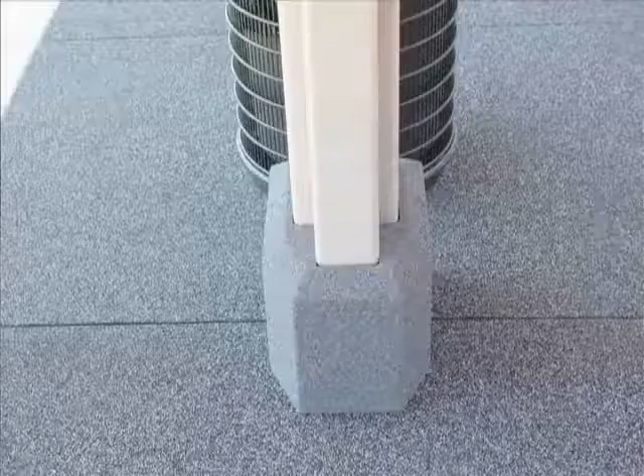Based on the test results that we have, the armor deck panel would be suitable for any kind of floor system because of its stiffness and high load carrying capacity.

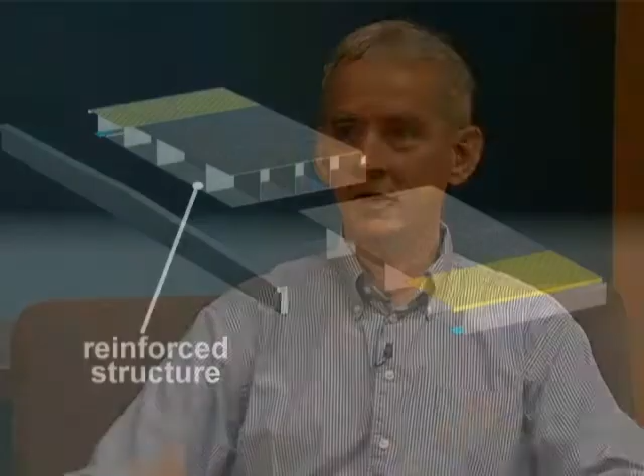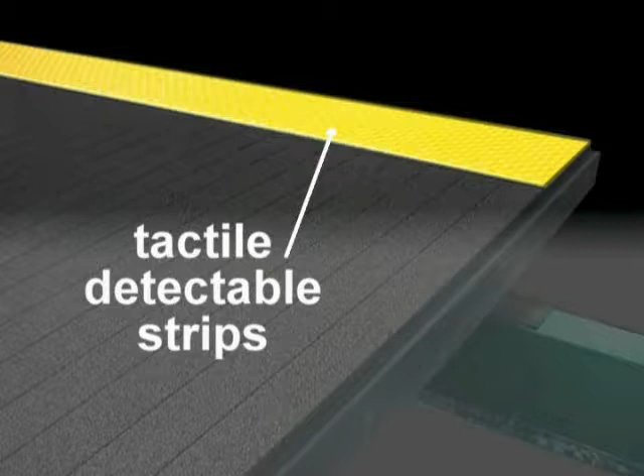Every aspect of the panel is incorporated into the manufacturing process, so when it comes out of the form, it's complete, including the anchorage plates that are all part of the forming process. If the panel requires tactile detectable strips on the edge, they're incorporated into the form. They're integral to the system.

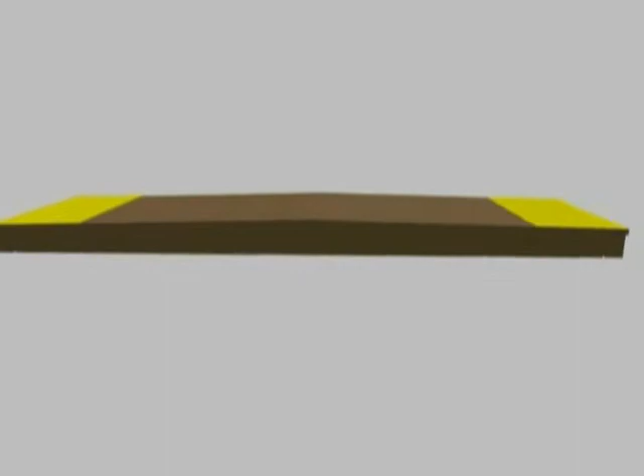The test protocol for this panel was developed primarily by WJE in conjunction with discussions with Engineered Plastics, looking at the product components, how they were put together, and how the product was made, to give us an understanding of what's inside this panel that we were going to receive.

We developed the test protocol, including the vibration test protocol, the load test protocol, the uplift force, and the uniform load values. The first test that we did on the armor deck panel was a vibration test.

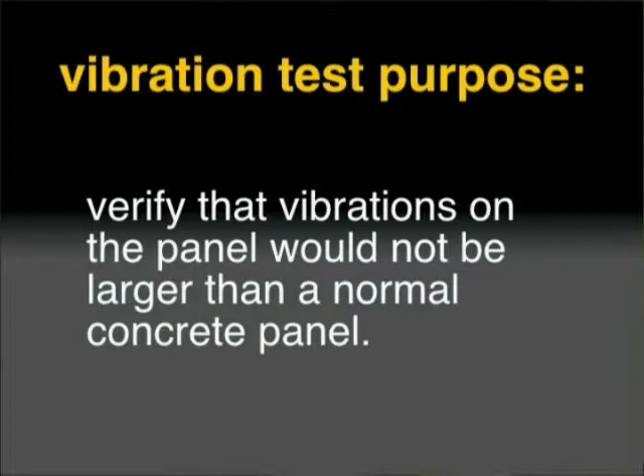The purpose of the vibration testing was to verify that vibrations on the panel would not be larger than anticipated on a normal concrete panel. There are ANSI guidelines for allowable vibration levels, or perceptible vibration thresholds.

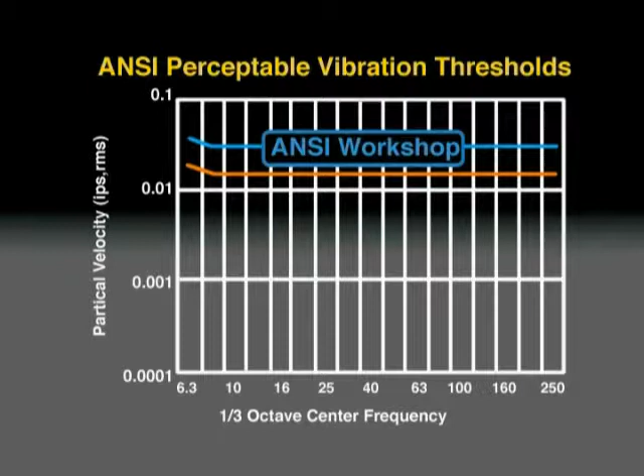Being a lighter weight structure than normal, we needed to verify that the vibrations on the platform did not exceed those perception thresholds. People standing on the platform would be disturbed if, while standing there, people walking behind them produced a large magnitude of vibration. So we needed to verify that those vibrations were not excessively large.

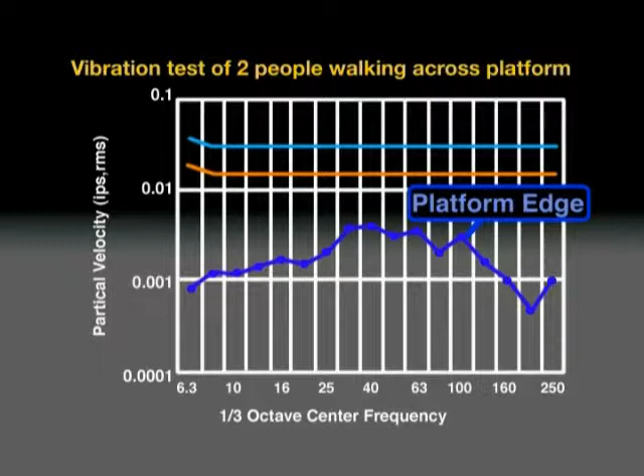The testing that we did showed that the vibrations on these panels were no larger than walking on a similar concrete panel. We set up the panel in the lab, measured vibration response due to small impacts to determine the resonant frequency and the damping characteristics of the panel.

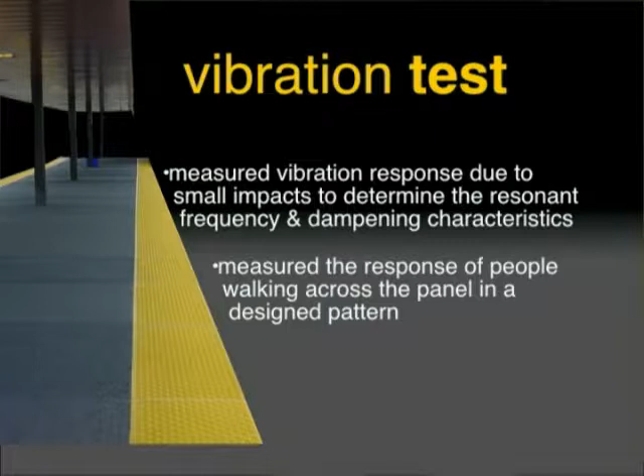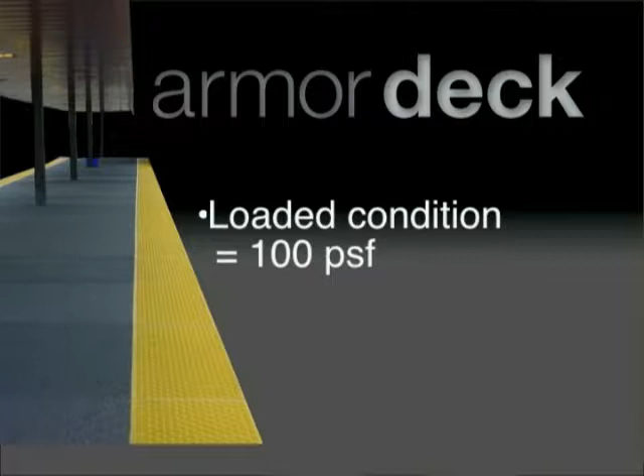Then we had people walk across the panel in a designed pattern and measured the response of people walking on the panel, both in an unloaded and a loaded condition, where the loaded condition was 100 PSF uniform load. We achieved that load by setting lead ingots across the panel surface, leaving a traffic pattern for the people to walk through, and we measured the dynamic response as they walked across the panels.

One test that we did in the field was a side-by-side vibration comparison test on a Metra station in Hazel Crest, Illinois. Engineered Plastics had installed one of their armor deck panels in a Metra station that was planned for renovation. They installed it in between the existing concrete panels.

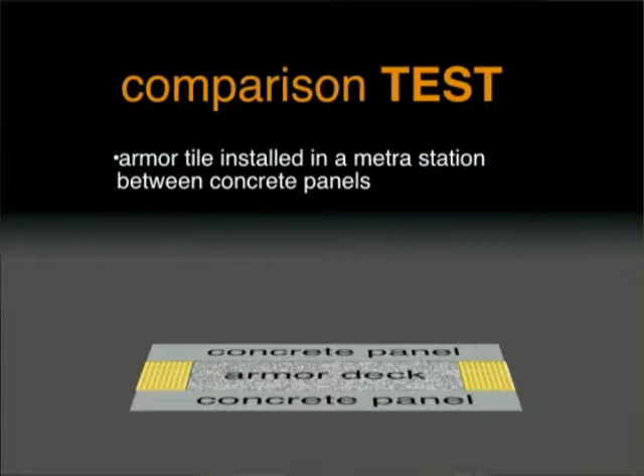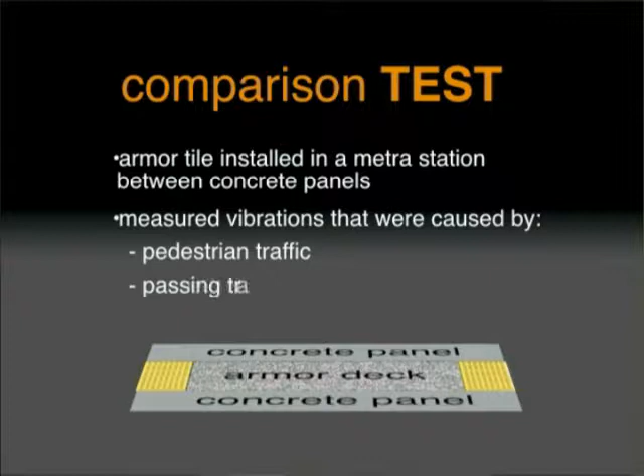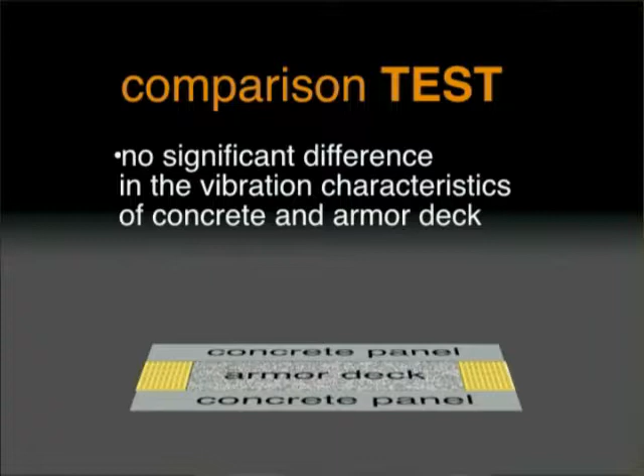I went to that station and measured vibrations produced by people passing, walking over the panels, and vibrations produced by passage of a train, to demonstrate the difference in vibration between the armor deck and the concrete panels. The results of that test indicated there was no significant difference in the vibration characteristics. The train passage produced essentially the same magnitude of vibrations on the concrete panels as the armor deck panels.

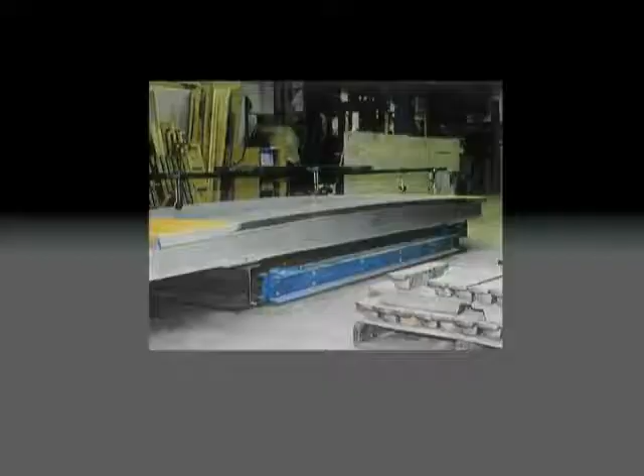The next test after doing the vibration testing was to do a load test on the panel, applying a uniform load in increments up until we actually failed the panel and got it to collapse. We applied these loads in 25 PSF increments, up to a uniform load of 300 PSF.

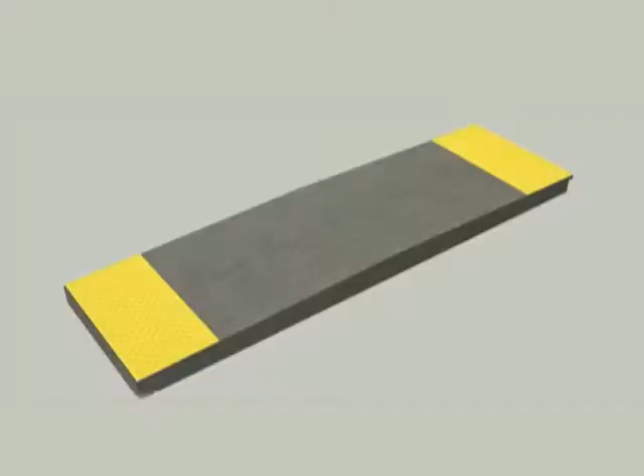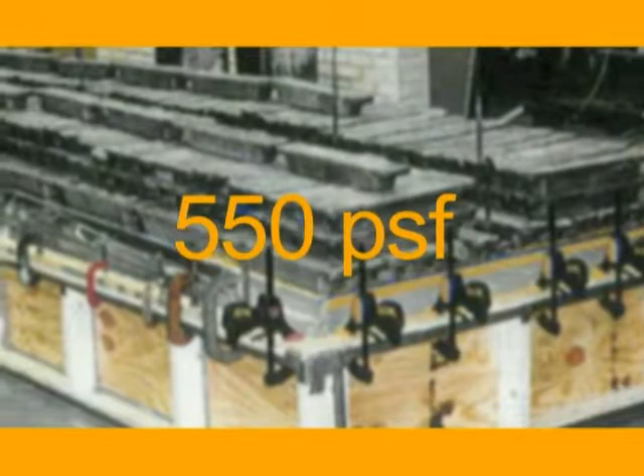The design load, or the intended uniform live load that should be applied to the structure, is 100 PSF. Our intent was to load it to 3 times that amount and verify that it could take that load safely with a minimum amount of deflection. We ended up applying a load of 550 PSF to the panel, and we still couldn't get it to fail. So it was basically 6 times the allowable design load.

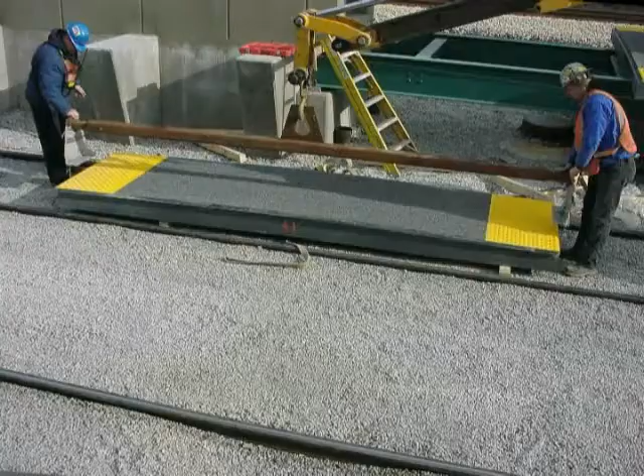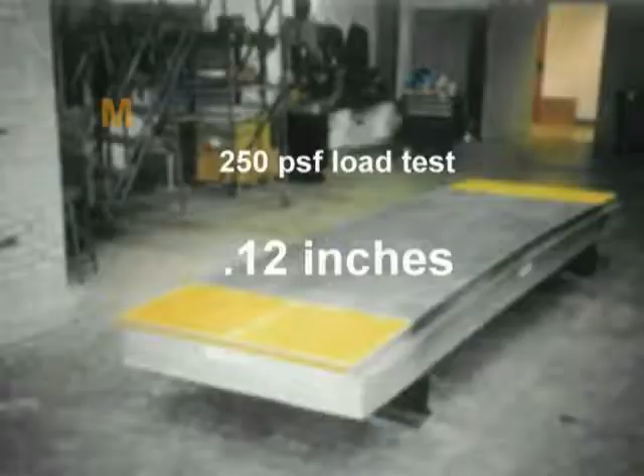As far as design criteria, the allowable deflection is supposed to be 1/240th of the span. We calculated that the allowable deflection at 250 PSF, which was the design allowable live load, should allow a deflection of 0.54 inches. The magnitude of deflection that we had at the 250 PSF load was actually 0.12 inches instead of 0.54. We calculated that out to be 22% of the allowable deflection.

This panel was impressive in how rigid it was.

The fact that we were able to load it to 600 PSF and still had no significant deformations, no failure of any element of the structure was impressive.

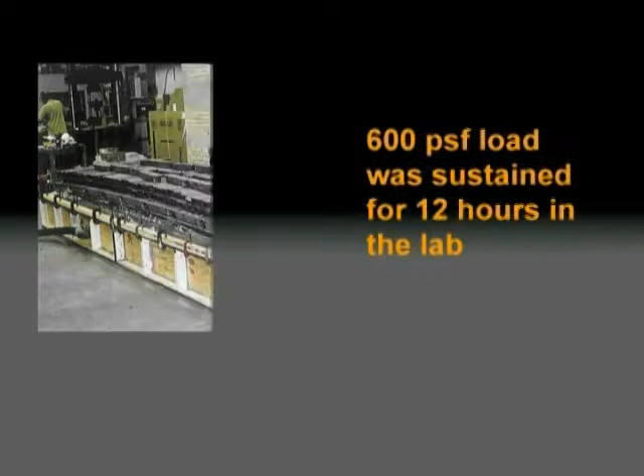During the course of the load test, when we applied the total of 600 pounds per square foot load to this sample that we had mounted in the lab, we held that load for 12 hours. It was a combination of the lead weights and the vacuum chamber that we were able to achieve that 600 PSF load, and we held that for 12 hours.

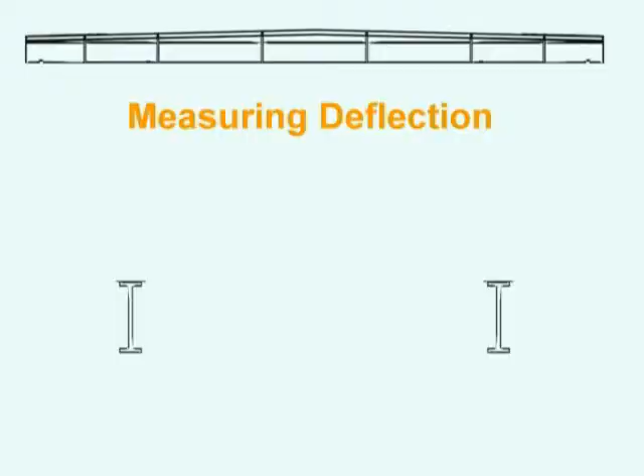During the course of the entire test, we were measuring the deflection at the mid-span and at the support points and at the overhang points on the panel.

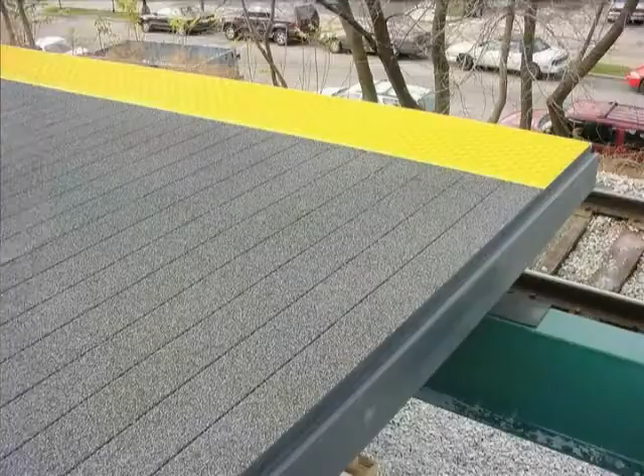The intent of this duration of applied load was to verify that the material didn't creep while the load was held on it. And then at the end of the test, we monitored the deflection for another 24 hours to verify that the material did or did not return to a 0 point.

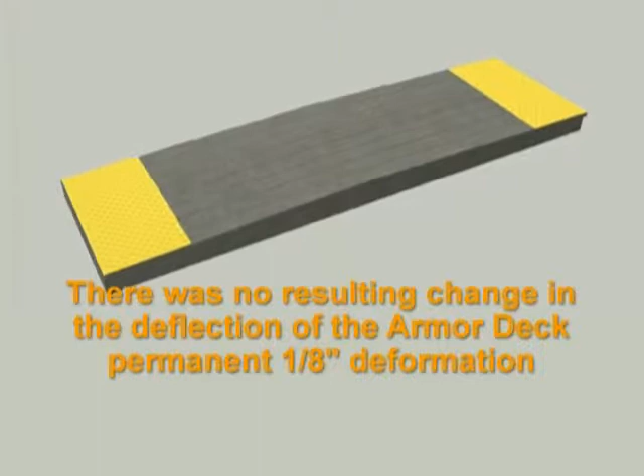It turned out after applying a 600 PSF load, the permanent deformation that had been set into the product was 1/8 of an inch, and that 1/8 of an inch remained after another 24 hours.

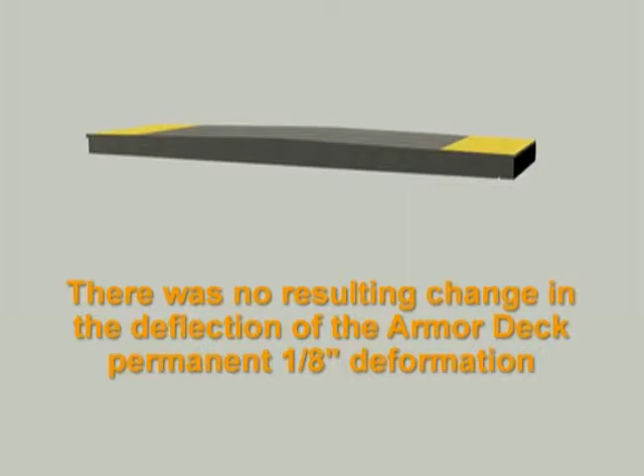The design criteria for a load test on such a product would dictate that the permanent deformation not exceed 1/4 of the total deflection, and we achieved a much better recovery than that.

We performed in the lab slip tests based on an ASTM standard test method with a standard slip device. It's a small weighted sled that has a texture on the bottom surface where it comes in contact with the product that's to be tested. It's placed on the sample, and one measurement is taken on the force required to pull this test rig across the sample, and then the product surface is wetted with water and the test is performed again. So there's a comparison of the dry and wet forces required to pull this weighted sled across the sample.

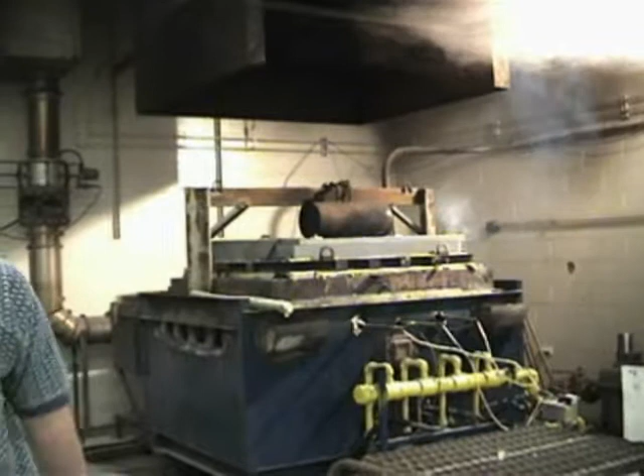In 2005, Armor Deck transit boarding platform panels underwent testing with Underwriters Laboratories in Chicago. The purpose of this testing was to collect thermal data to ensure the panels met the requirements of the Chicago Building Code. The testing was conducted in accordance with ANSI UL 723 to simulate fire exposure conditions that might occur on an elevated transit platform.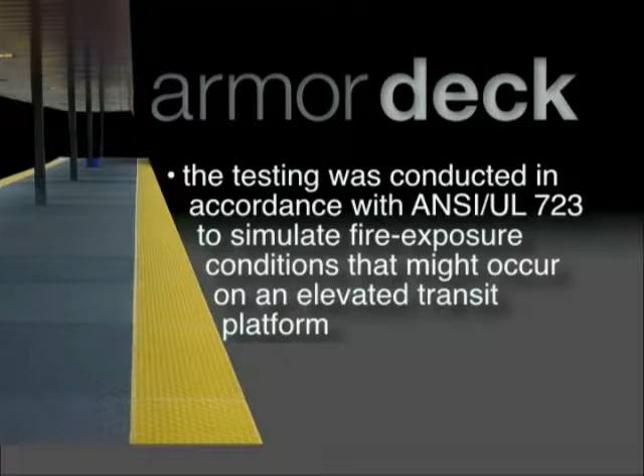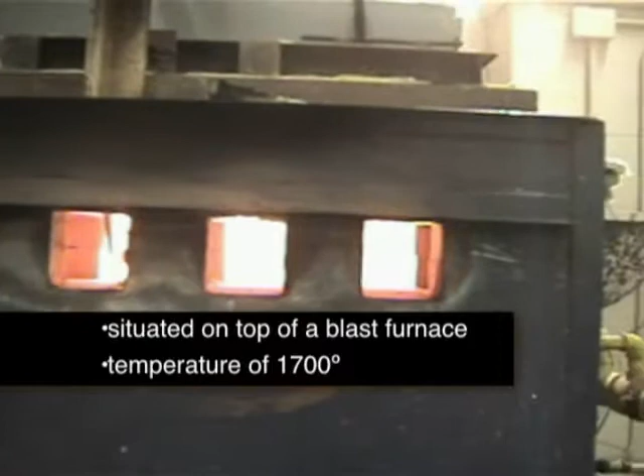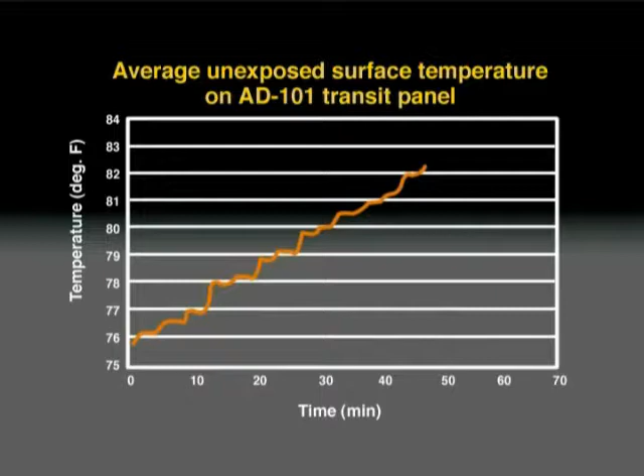The test ran for 1 hour and consisted of a 48-inch by 48-inch section of Armor Deck situated on top of a blast furnace with open flame, which maintained a temperature of 1700 degrees. Armor Deck maintained zero flame penetration and produced only a 3% rise in top surface temperature of the allowable tolerance, while simultaneously withstanding a 500-pound static load. The Armor Deck panel was then removed from the furnace, and a 1,000-pound static load was applied with no deflection.

Our laboratory test on the full Armor Deck panel took place in 1999. In 2005, Engineered Plastics came back to us to ask us to review our test results and comment on how those test results compared to the City of Chicago load test requirements.

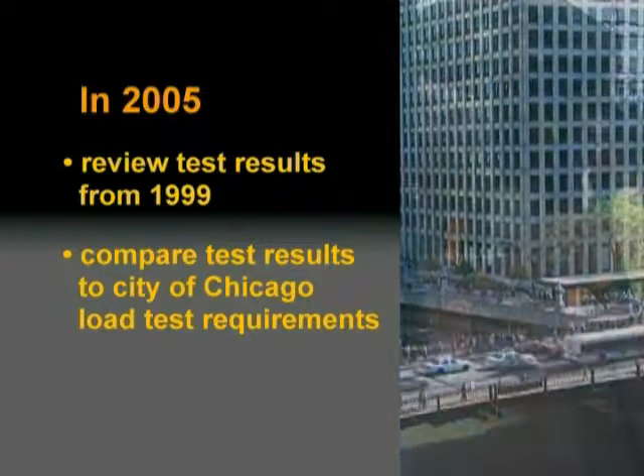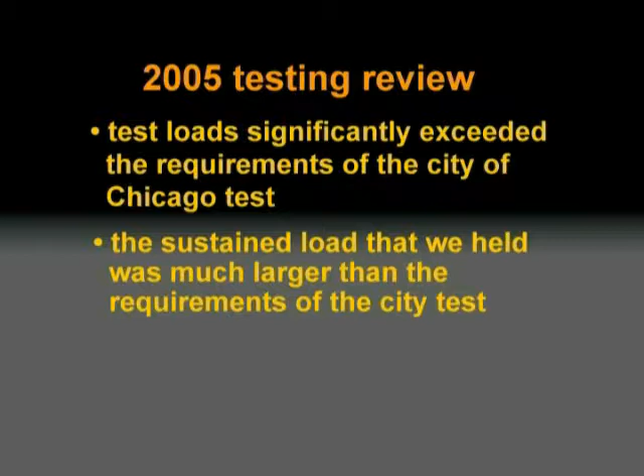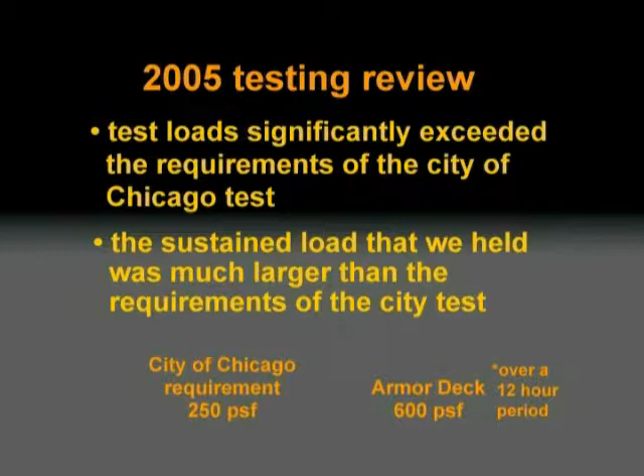In that process, we noted that we applied loads that significantly exceeded the requirements of the City of Chicago test. The sustained load that we held was much larger than the requirements of the city test, which would have been 250 PSF. We held a load of 600 PSF, but we only held that load for 12 hours, where the City of Chicago required that the load be held for 24 hours.

Because our test protocol didn't exactly match the city test protocol, they required that we do design calculations, or load capacity calculations, for this panel. In order to do that, we had to get material properties.

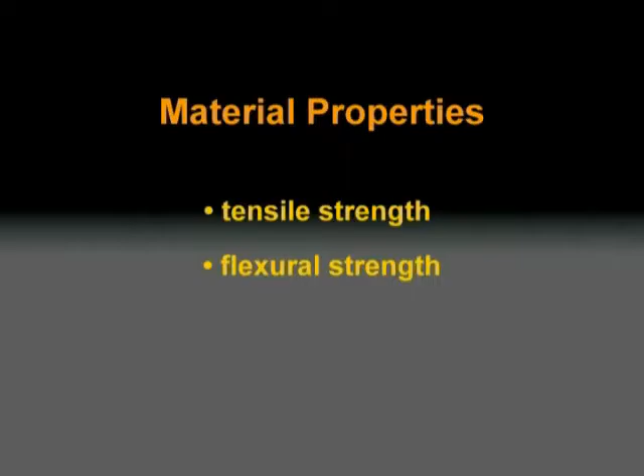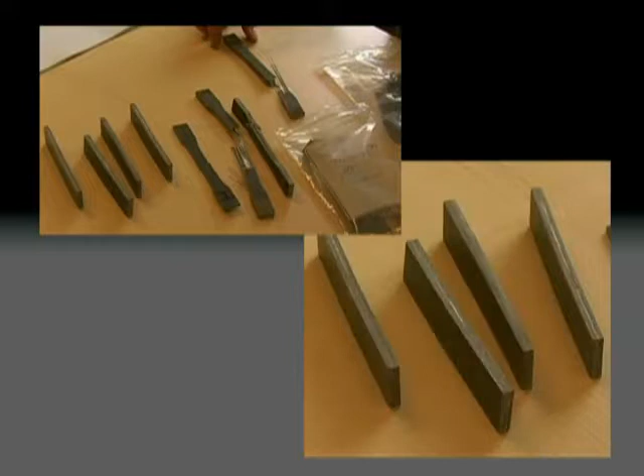The two in particular that we needed for our calculations were the tensile strength and the flexural strength of the product, the strengths of those elements. So we had Engineered Plastics cut up a sample panel into test specimens to do flexural tests and tensile tests.

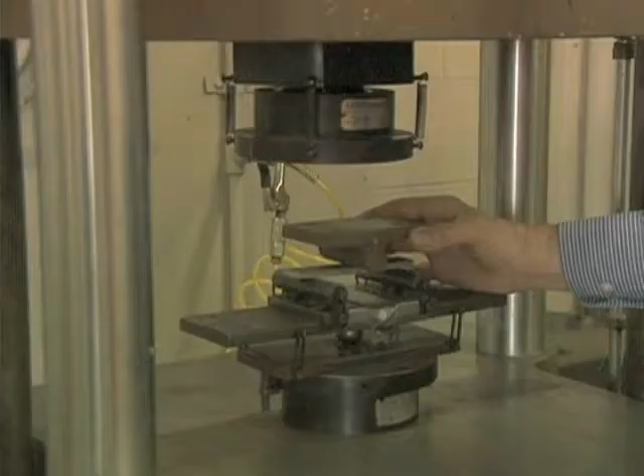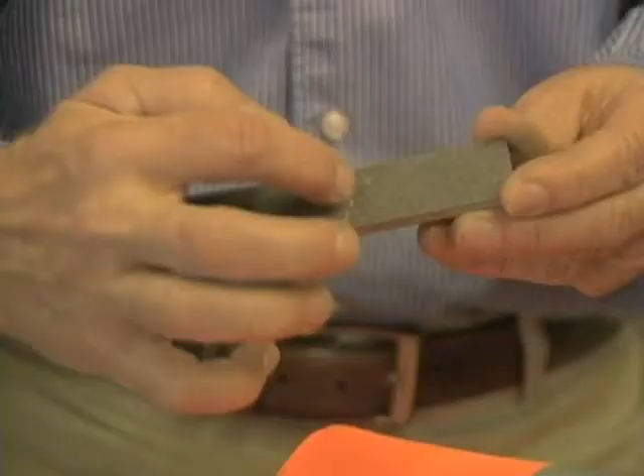The original testing was intended to show, or demonstrate, the load capacity of the Armor Deck panel. The subsequent testing that we did was to support the calculations that we were doing to determine load capacity ratings, what the City of Chicago was asking for to satisfy that requirement of the city.